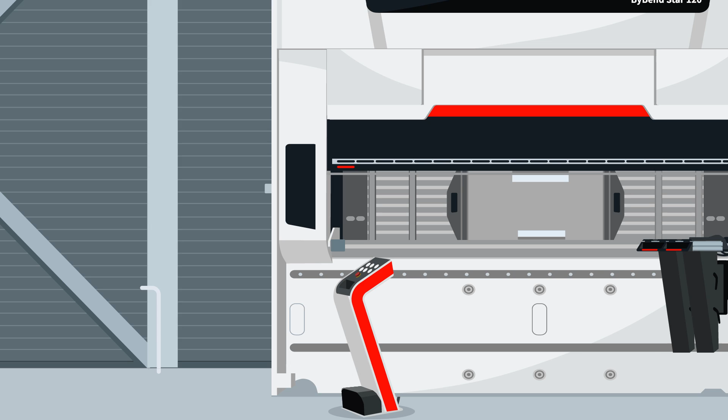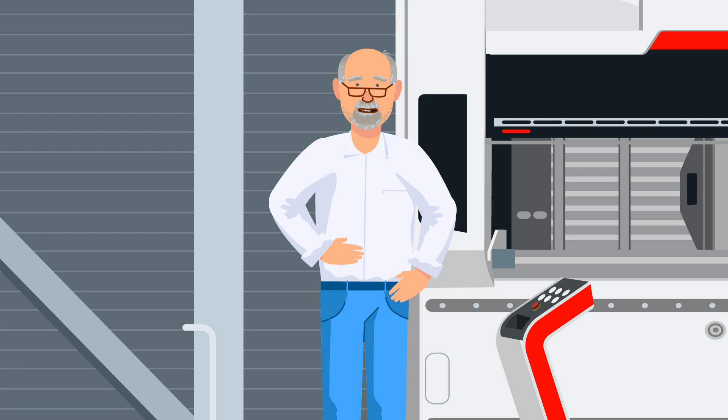The crowning process is one of the most critical components in any bending machine. Proper crowning ensures the straightness of your parts. An exceptional crowning mechanism achieves this effortlessly, eliminating the need for manual programming, corrections or interventions. As we have always done, it operates completely autonomously. This feature truly offers peace of mind.

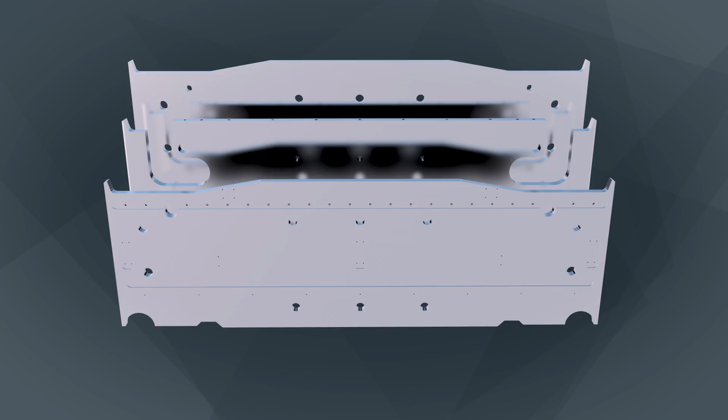Here is how it works. We have a 3-beam construction. We also call this a sandwich construction. It is very similar to our renowned dynamic hydraulic crowning. All 3 beams are welded to the side frame over their whole height. This adds to the stiffness of the machine.

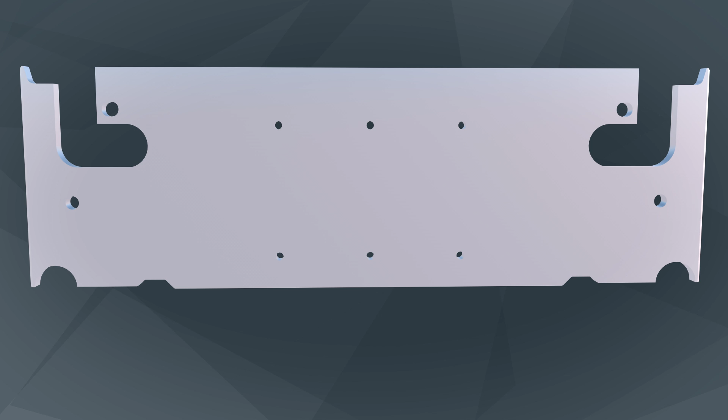The 2 outer beams have a recess on the outer sides, so they only touch the table in the middle. This gives the construction a force-dependent shape change. The middle beam has a deep L-shape cutout on the outer sides, which serves as a pivot point. The beam bends downwards on the outer sides of this cutout.

There are 2 axes connecting the 3 beams above the center of these L-shaped cutouts. These limit the downwards movement of the middle beam when we exceed a certain force, and stiffen the entire sandwich construction and prevent any permanent deformation.

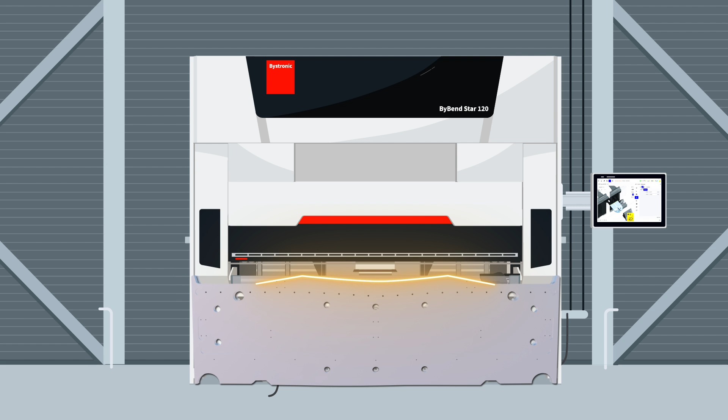The outer beams bend downwards with a force and position dependent shape. The middle beam acts as an upwards bow, which compensates for the needed crowning of the upper beam. The sum of both shapes perfectly compensates for the deformation caused by the part.

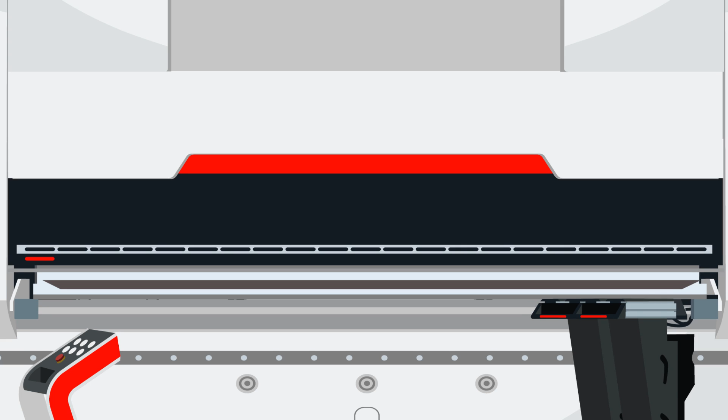Numbers. If I bend the part over the whole length and use the full 120 tons, the total parallelism between the upper and lower beam is less than 0.04 of a millimeter. That is devilishly clever.

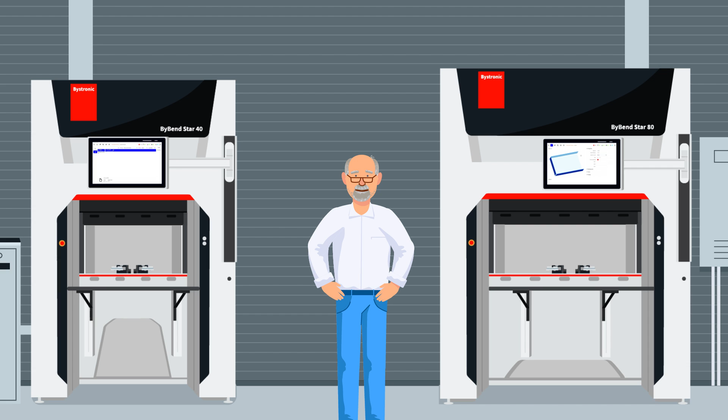Now, you might wonder, like I did, why isn't this applied to all machines if it works so effectively? That's an outstanding question. On our ByBend Star 80 and 40 bending solutions, crowning is unnecessary. These bending machines are constructed in such a manner that they are considerably over-dimensioned, leading to minimal deformation. Even when subjected to maximum force, the angle variation is far from perceptible.

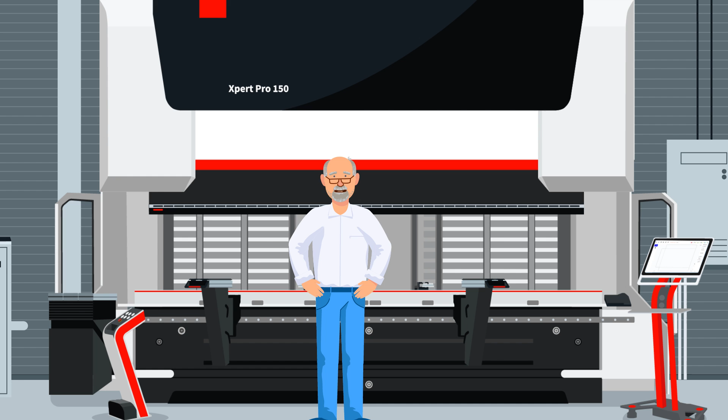Regarding the larger Xperts, we already boast the finest crowning system worldwide. Thus, there is no need to alter it.